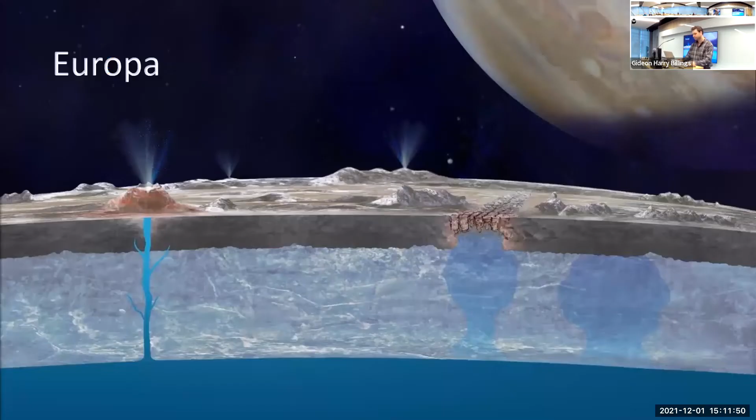In recent years, the attention of the science community has been drawn to some of the liquid ocean-containing moons in our solar system. One of these is Europa, a moon of Jupiter, thought to be a viable target for extant life. This is because there's strong evidence that beneath the ice crust could be a liquid ocean, and in the core of Europa there could operate similar geothermic processes to those in Earth's core, which could lead to hydrothermal venting.

This is really interesting because hydrothermal venting was one of the great discoveries of the 20th century. These venting systems were discovered to host chemoautotrophic organisms, which can use chemical processes to get energy rather than photosynthesis, and these organisms in turn support tiers of exotic life. The discovery of thermal vents transformed the scientific community's view of the benthic ocean, which was historically thought to be a barren landscape, to now we know that it's a rich place for life.

Also shown on the bottom right of the slide is what were dubbed Kallisti Limnes. These were discovered by one of my collaborators in 2012. They're carbon dioxide accumulating subsea pools, essentially the same composition as opal in liquid form, and they were found to support colonies of silica-based organisms. So sub-ocean discoveries like these have really vitalized ocean research, and they motivate exploration of environments where photosynthetic life is not viable.

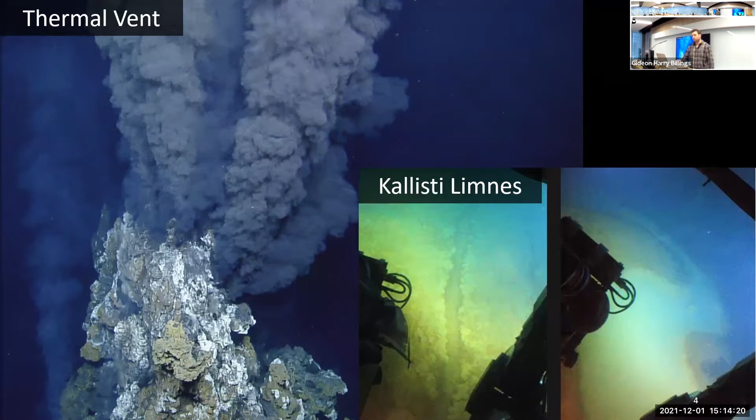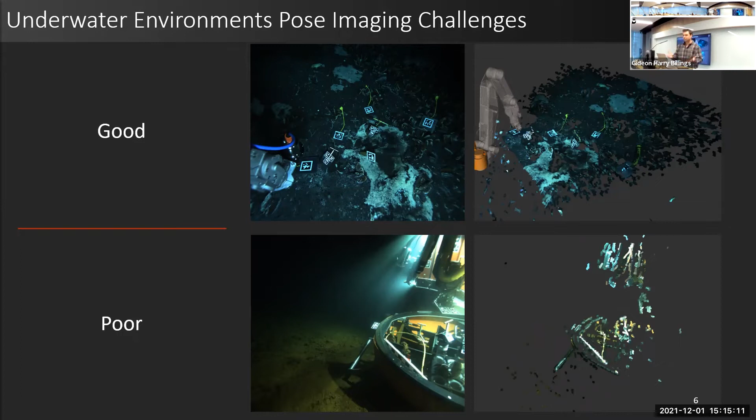However, the underwater environment presents many unique challenges to automation. One of these challenges is the limitation of vision-based sensors, due to water column effects. If you have really clear water and ideal lighting, shown at the top, you can get visual methods that work really well, shown by the dense point clouds. But in less than ideal water quality, where there might be haze and backscatter in the water column and suboptimal lighting, you tend to get vision methods that perform poorly.

This is just a brief summary of my research contributions that I'm going to go through in this talk. The first part of my work, the first two points, address the problem of detecting the pose of underwater tools so that they could be grasped and manipulated in an automated system. The envisioned application was to use a camera mounted on the wrist of the manipulator, which could be moved around to detect the tools and grasp them.

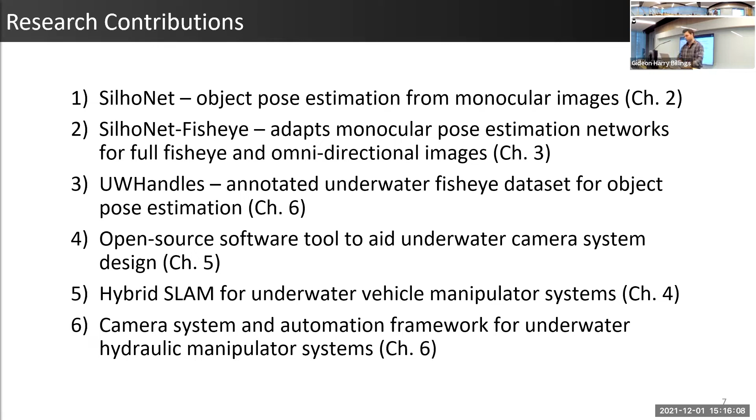I also collected and published an annotated underwater dataset that supported my work on the development of these visual methods. My latest contribution was the development of a SLAM method designed for underwater manipulation systems that can support real-time 3D scene reconstruction. My other contributions relate to the design and implementation of an automation framework for these underwater manipulator vehicles.

So I'm going to go into my first contribution, which was SilhoNet. This is a novel method for object pose estimation from monocular images.

So you can have a variety of objects. There can be occlusions, objects can self-occlude, or there can be clutter in the scene. There can be varying scene illumination, and also objects appear different depending on what viewpoint you're looking at them.

Also, while there's many applications which motivate the use of monocular images, the best performing pose estimation methods tend to use depth data. But I'm motivated by marine applications where depth sensors tend to be noisy or unreliable. Also, I'm targeting mounting a sensor on a manipulator. Housing a depth sensor on a manipulator would be very bulky to actually mount.

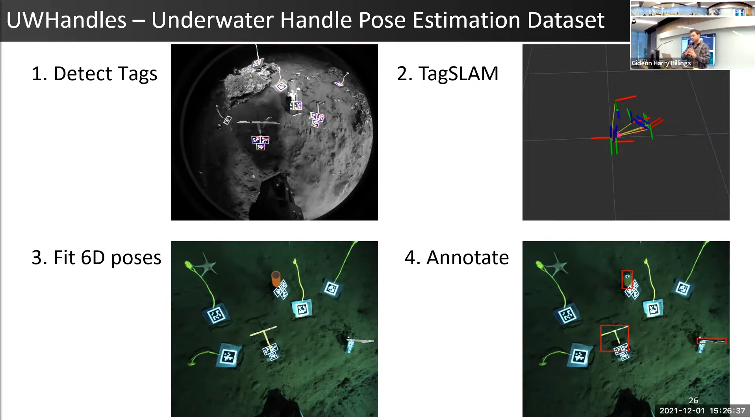An observation in underwater manipulation is that each institution tends to use the same kind of handle for all of their different tools that they use. So this can benefit automation, because if you can detect the pose of a handle and then model the attached tool, then you only need a method that can automatically detect the handle. So towards this end, our collected data set has annotated poses for 3 different types of common handles used in underwater manipulation.

There we go. Just had to restart. All right.

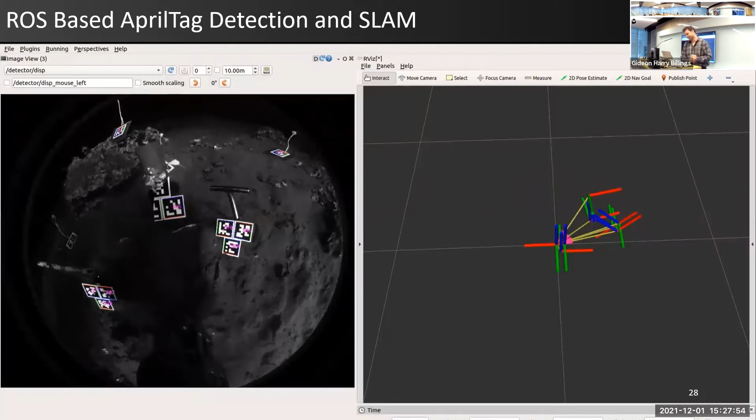There we go. So this shows AprilTag detection SLAM just running in ROS, and the output is a consistent camera pose for each image in the sequence. So I also couldn't find a freely available tool to do the kind of annotation that I wanted to do on this data set. So I developed my own tool, which enables projecting the object models into the sequence. You can scan back and forth in the sequence, tweak their fit, filter out outliers, and then project the whole image sequence. So these are actually fisheye images, but they're center rectified for visualization of the projected models.

Why do you have three tags? This is redundancy. Yeah, so the tags are kind of meaningless, like it's arbitrary where they're placed. We just put small tags on the tools because we'd be getting close to them. And so having small tags lets you get arbitrarily close or far. And then we put big tag plates dispersed out in the scene. But in this data set, the actual tags don't really matter. We found that 3 tags was more robust to detect than 1 single tag, which could be noisy in the fisheye and underwater. So more tags was just greater robustness.

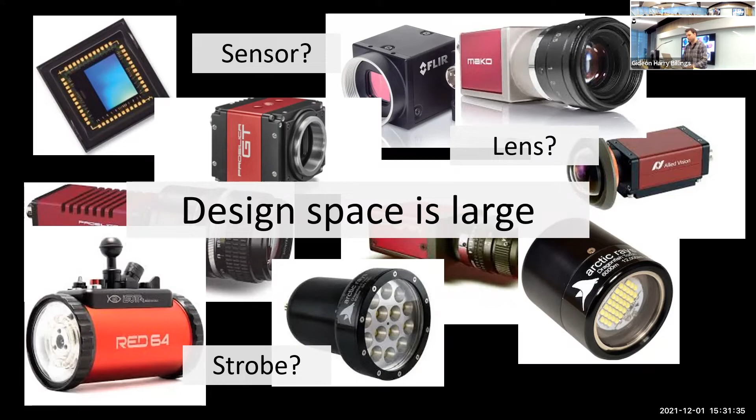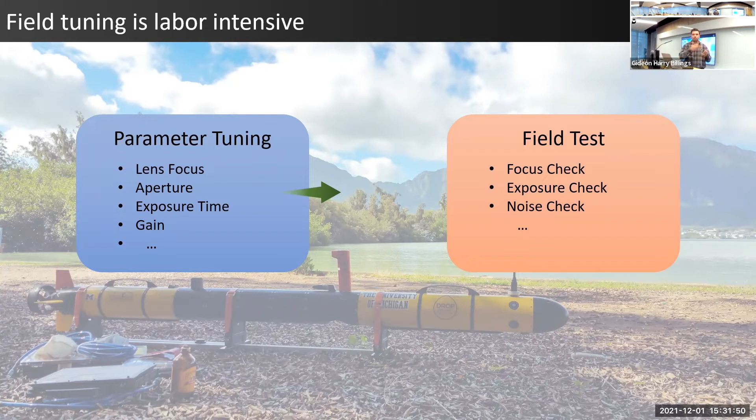So the process of designing and tuning such systems is often labor intensive, where you kind of tune your parameters, and you go in the field, you check the performance, make sure your noise levels are reasonable, make sure your image quality is good, and then you kind of go back and forth until you're at a happy medium.

So myself and my lab mate at the time, Eduardo Iscar, we developed an open source tool that took all of this in-house knowledge and fieldwork knowledge, and we developed a simplified model incorporated in this tool that can give you a back of the envelope calculator for how to design these kind of imaging and lighting systems. They inform the initial design choices, and you can tune parameters to see how they affect the overall performance. Our model accounts for light spectrum attenuation in the water column, benthic reflection, and lensing and sensor effects.

And then we experimentally verified the performance of our model in a simple lab tank setup where we had a clear acrylic tank. We put a strobe and a light on one side of the tank, and then a white matte board inside the tank on the opposite wall. And we used a spectrometer to measure the light signal at the board and at the cameras. And then we verified that the predicted attenuated light signal matched what we measured with the spectrometer.

And then we measured responses for 2 different camera sensors, where we kept the scene lighting constant but increased the sensor exposure time, and verified that the response curves matched up with the model. And then we did a similar test, but kept the sensor the same and changed out the lens, and then changed the aperture values, and also verified that we had a reasonable approximation. This is just a screenshot of the tool. It's just a simple calculator kind of interface.

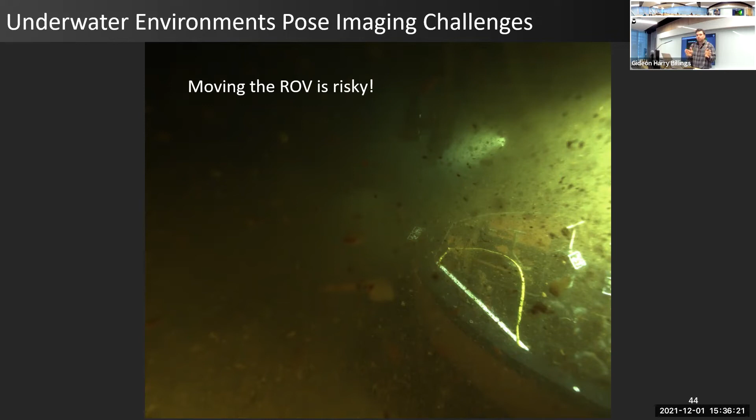However, direct interaction with the seafloor environment comes with risks, in contrast to systems that are just making passive surveys of the seafloor. So one of these challenges is that once a vehicle commits to a particular sampling location, it's not always feasible to move the vehicle around because you could greatly disturb the scene state, and you'd have to wait for the water clarity to equalize out. And often then the view of the workspace is limited to kind of one view for vehicle-mounted cameras throughout the duration of the sampling procedure.

So a natural solution to this problem is the fusion of multiple imaging sensors into the reconstruction framework. However, space for additional cameras on underwater vehicles tends to be really constrained because you have a lot of things mounted on the vehicle. So in my work, I have used a hybrid camera system that's composed of a vehicle-mounted stereo pair and then a manipulator-mounted wrist camera that is a fisheye. The stereo camera can provide dense point clouds of the scene, but only a limited view of the manipulator workspace. The fisheye camera, on the other hand, can be moved around actively throughout the scene to obtain different perspectives and provide a super view of the environment.

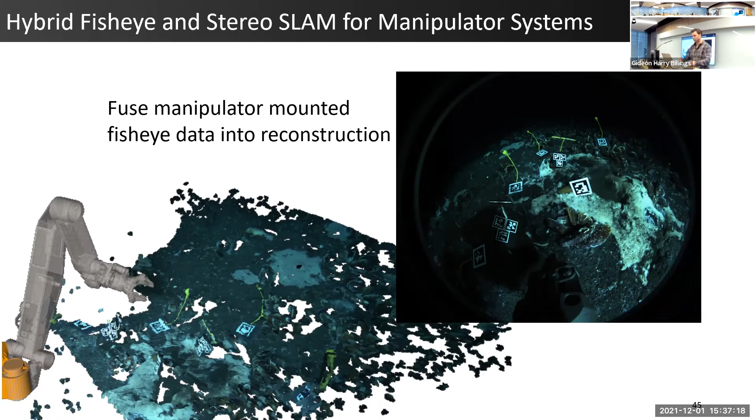However, in these hybrid sequences, the stereo is pretty much stationary because the ROV is set down on the seafloor. So I wanted to have a stereo data set that could really evaluate the underlying stereo SLAM performance of the method. So we used a diver-operated stereo rig, which I helped build, to collect an image survey of a coral reef in Australia. So I processed that stereo image data set with COLMAP to produce ground truth trajectory.

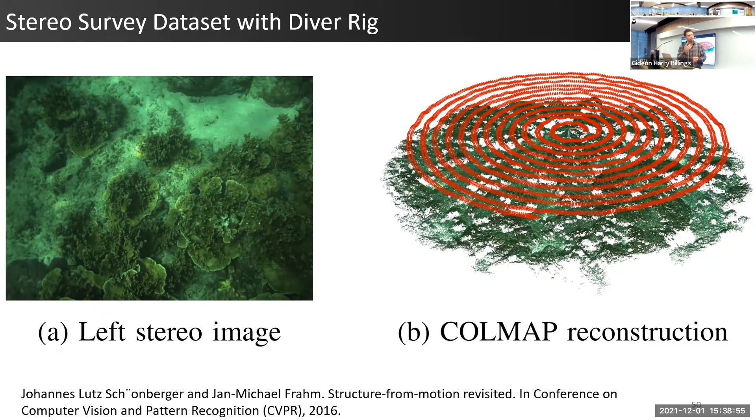And then I started by approaching the development of my method from the ground up. So the first question I wanted to ask is, what is the best feature to use in the SLAM method? I wanted to find a feature that was suitable to the underwater environment and also could robustly match between the hybrid frames, being a fisheye and a perspective stereo. So I evaluated the feature matching performance of different features by estimating an essential matrix using feature matches across hybrid image pairs. I initially found that many features were located on the artificial AprilTags in these data sets, which skewed the results. So I projected masks over the tags to limit the evaluation to natural features.

Then I compared several popular conventional features as well as 2 deep learning-based features, which were ContextDesc and SuperPoint. Since the essential matrix does not provide scale, I evaluated the translation accuracy by using the angular difference between the translation vector direction of the predicted and the ground truth. I used area under the accuracy curve as my evaluation metric. So interestingly, ContextDesc greatly outperformed all the other features. If you look at the mean number of feature inlier matches per hybrid frame, it's nearly double the best performing conventional feature, which is RootSIFT.

Out of the conventional features, SIFT and its variant RootSIFT perform the best. So for my work, I chose to use a GPU-accelerated SIFT feature for ease of implementation. But what's really interesting is ContextDesc uses the SIFT feature point detection, but uses deep learning to compute the descriptor. So my method is directly compatible out of the box with ContextDesc features.

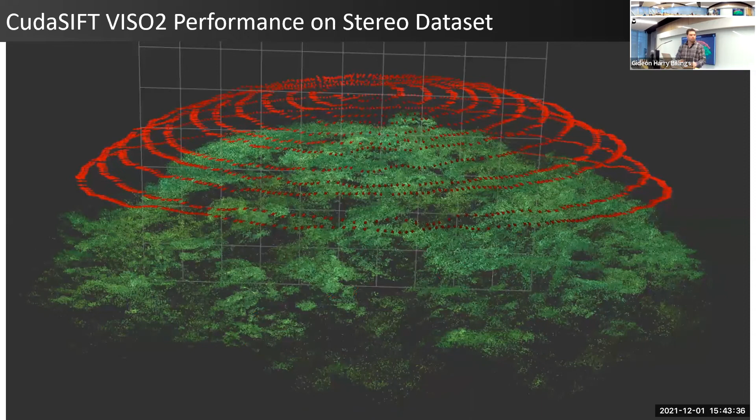My next step was to develop a full SLAM method. I based my method on OrbSLAM 2, which is a very popular and mature SLAM method for both stereo and monocular cameras. It uses a 4-threaded architecture for tracking, local mapping, loop closing, and then full bundle adjustment, which is a full optimization of that.

But the implementation of OrbSLAM 2 is tightly integrated with Orb features, which was one of the features I tested and performs pretty poorly underwater. So here's a block diagram of my SLAM method. For sake of time, I'm only going to mention some of the high-level notable differences from OrbSLAM 2.

I modified the tracking thread heavily. There are 2 separate branches for the stereo and monocular fisheye frames. CudaSIFT features are extracted from each new frame and then propagated through the entire pipeline. The stereo branch uses my modified VISO2 odometer instead of the velocity-based tracking method used in OrbSLAM 2.

The initial map is created from a stereo frame, which provides the initial scale constraint, after which both stereo and monocular keyframes can extend the map. The other threads in the system remain largely the same as OrbSLAM 2, with some modifications to support the hybrid keyframes. I also adapted the bag of words-based visual place recognizer used by OrbSLAM 2 to use SIFT features, and trained it on a 1,000,000-word vocabulary with a diverse set of underwater images.

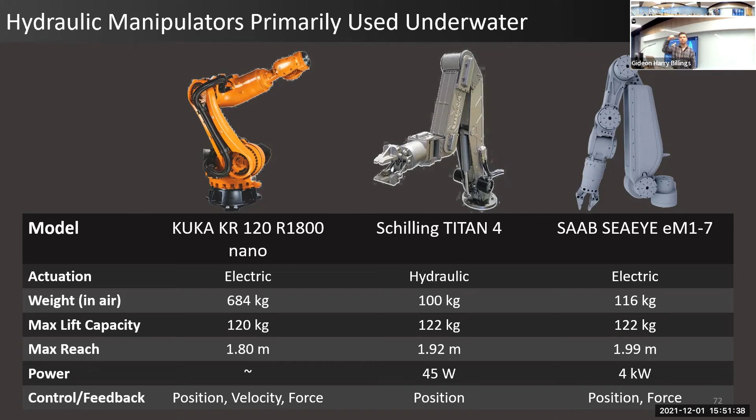Hydraulic manipulators have several positive attributes, which make them the manipulator of choice for deep ocean vehicles, but they're not designed for automation. They provide limited feedback and less precision compared to their electric counterparts.

Further challenges of automating underwater manipulation compared to terrestrial systems are that the hardware and operations are much more expensive. The hardware is prone to failure, and you must anticipate failure in the field, which I experienced on basically every field trial I was involved with.

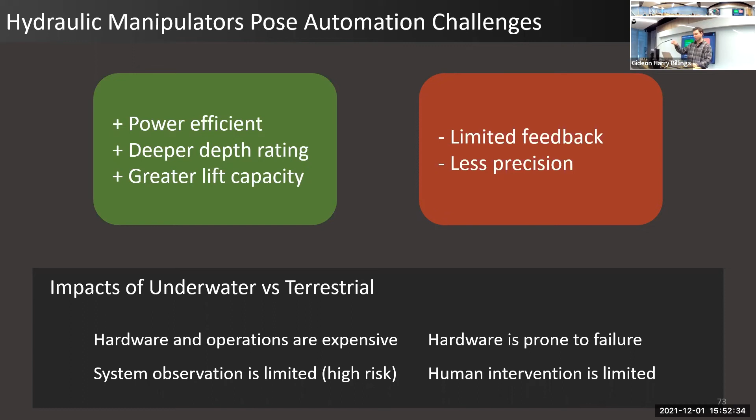The observation of the system is limited, so when the vehicle is deployed, there's increased risk of operation and testing. Usually you only have visual feedback from cameras and some sensor data. Intervention is also limited if something goes badly—you don't have a fail-safe switch you can just hit, and recovery of the vehicle is the priority when doing field work.

There have been several past projects focused on automating underwater manipulation, but many fall under the task of intervention on man-made structures, such as turning a valve, and most use electric manipulators in shallow water environments like pools. There was some very recent work out of the University of Limerick in Ireland, where they developed a visual servo control framework for hydraulic manipulators, demonstrating impressive precision control in both tank and field deployments.

But their system did not employ any kind of path planning, and they were really focused on just the precision task demonstration. So my work on manipulator autonomy is complementary to these prior works and emphasizes practical field demonstrations in natural seafloor environments.

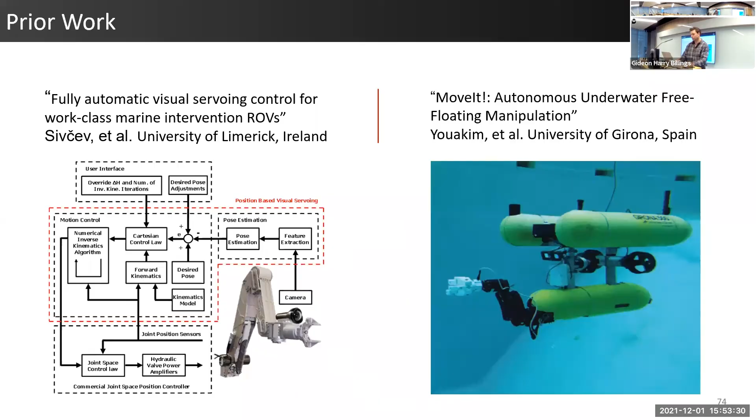In order to develop and test the automated system, we built an in-air test bed that uses the same type of hydraulic manipulator used in our field trials. The test bed also has the same machine vision camera setup and a similar configuration to how it will be mounted on an ROV.

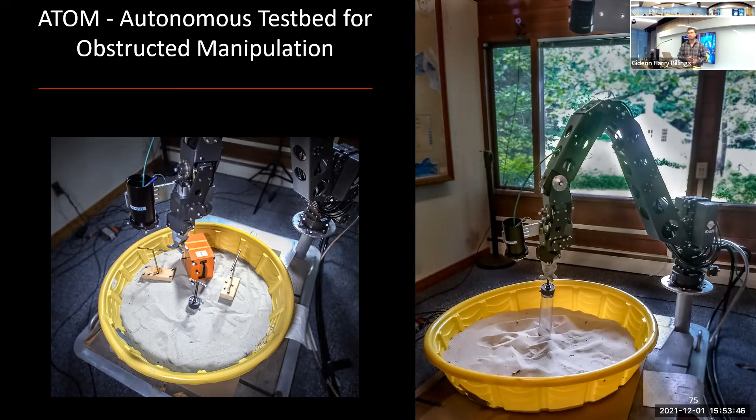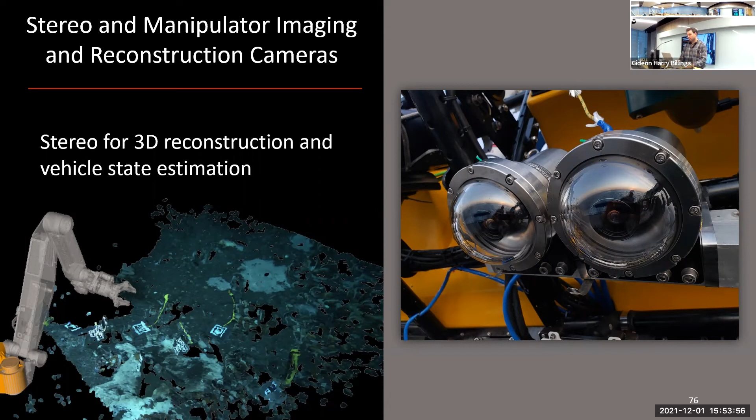The vehicle-mounted stereo cameras are used for scene reconstruction and vehicle state estimation, which you've already seen some of. The wrist-mounted fisheye camera is used primarily for tool pose estimation and extending the 3D reconstruction. This slide shows the calibration procedure we went through for the visual and kinematic system.

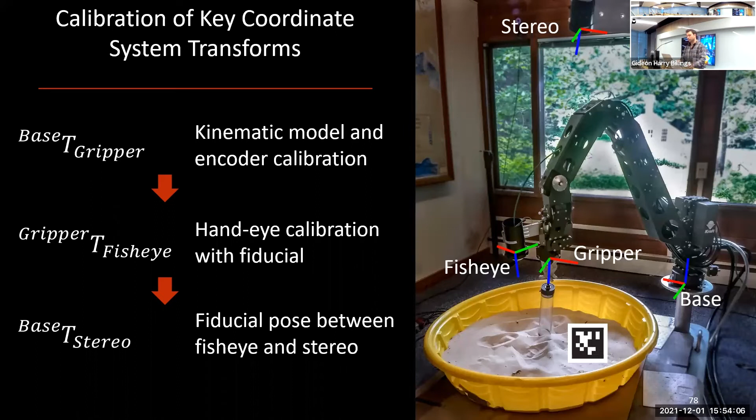I won't really spend time on this.

If the tether breaks, the vehicle switches to an AUV mode and can autonomously return to the vessel. It's designed for operation under ice, so it can operate kilometers away from a surface vessel, whereas most vehicles with a standard tether have a very limited distance they can operate from the ship. One of the big automation challenges with the NUI vehicle was also these articulating doors—since it can be a hybrid AUV/ROV, these doors can open and close.

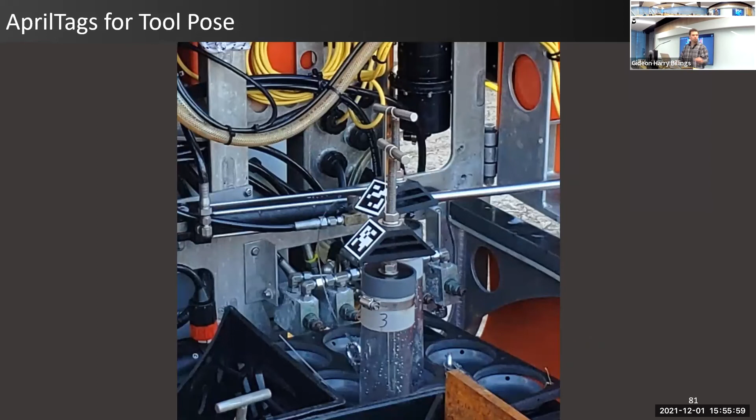AprilTags were also attached to the tool handles, and the model of the mounts and the handles were directly modeled so that you could get the handle pose directly from the tool or from the fiducial detections.

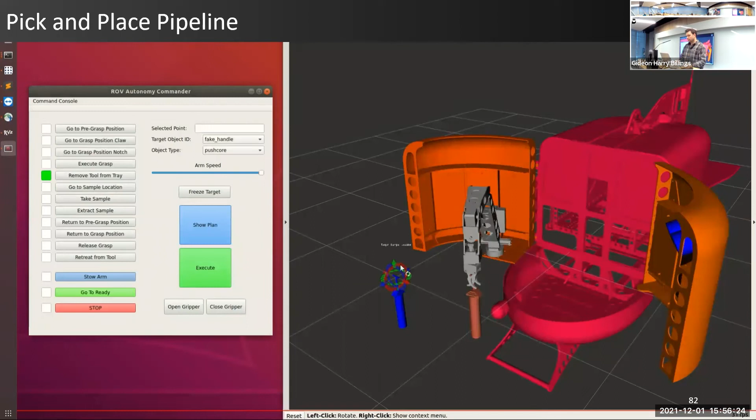In order to make every step of the automation control very transparent, I developed a high-level interface to MoveIt, which is a motion planning framework that's very popular in robotics. This interface was geared towards ROV manipulation tasks.

This enabled a pilot to step through a task and visualize each movement before execution so they could verify it looks safe. So this is just showing a simulated demonstration of how that interface works.

I just want to point out here that besides the graphical interface to the autonomy, we also had a natural language interface, which is a prototype, where the pilot can simply speak a desired command. This was work done in collaboration with Matthew Walter at the Toyota Technological Institute in Chicago.

So I'll now go into some of the results we've gotten from the field. I've participated in 4 research cruises over the course of my PhD work.

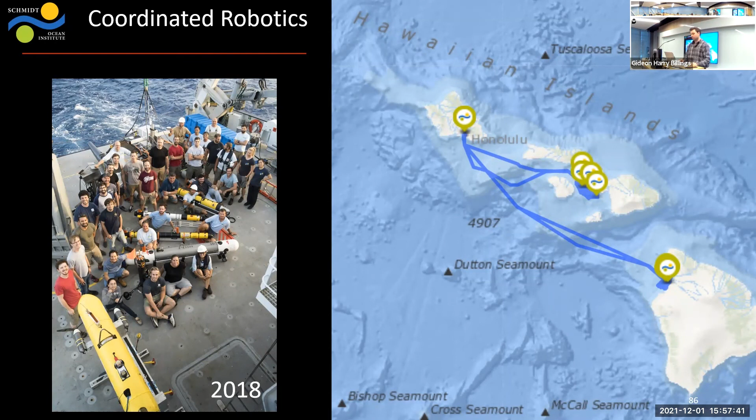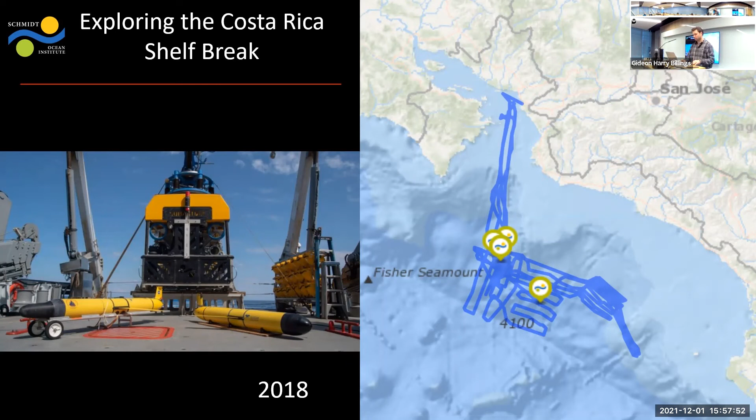The first cruise was with Schmidt Ocean Institute in the Hawaiian Channels. The second cruise was also with Schmidt, where we explored the Costa Rica continental shelf break. The third cruise was in the Mediterranean Sea off the coast of Santorini, where we explored the active submarine volcano Kolumbo.

Both of these cruises and the cruise in Costa Rica were operated like analog missions to an extraterrestrial exploration of, say, an ice moon like Europa. In this analog, the surface ship operated like an orbiter doing flyby mapping.

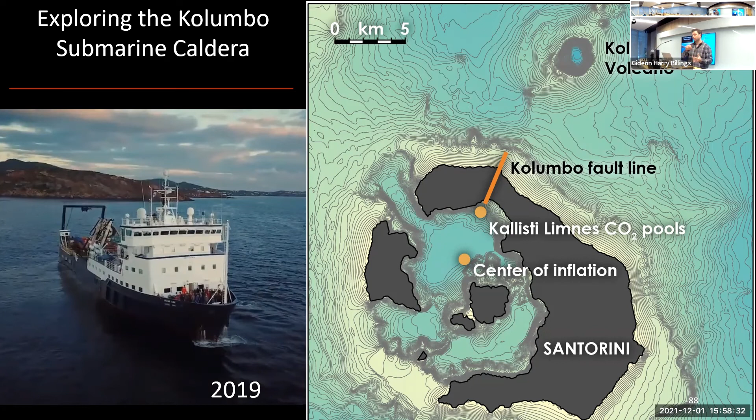The gliders acted like long-range reconnaissance drones. They were outfitted with mass spectrometers to sense chemical anomalies, and they also had scanning sonar to do terrain-aided navigation. The ROV, the NUI ROV, acted like a lander, where mission waypoints were informed by data collected from both the ship and the gliders.

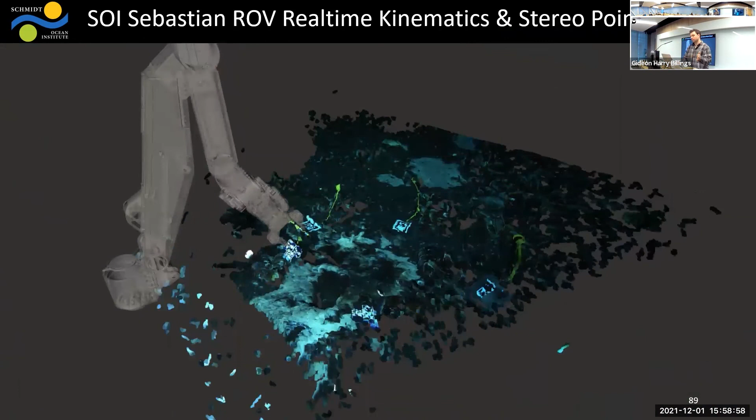The first demonstration of my system was on the Costa Rica cruise, where we collected the data sets used throughout my thesis work. We mounted our camera system on the Sebastian ROV, operated by Schmidt, and we demonstrated 3D point cloud visualization and the calibrated kinematic configuration of their manipulator. We were able to have this as visualization for the pilots in real time.

Then the next demonstration was on the Atom testbed, where I showed fully autonomous execution of the pick and place pipeline using just the graphical interface and no direct pilot control of the manipulator.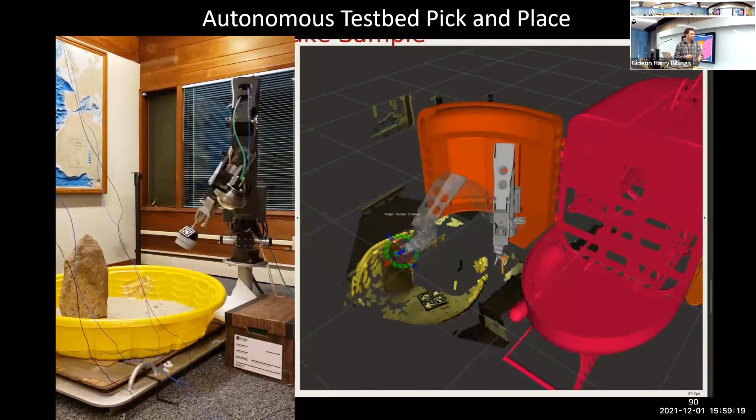So I'll just let this finish here. This is essentially, before I was allowed to deploy the system on the actual vehicle, I had to do demonstrations in simulation and on the testbed to show that it was a viable method.

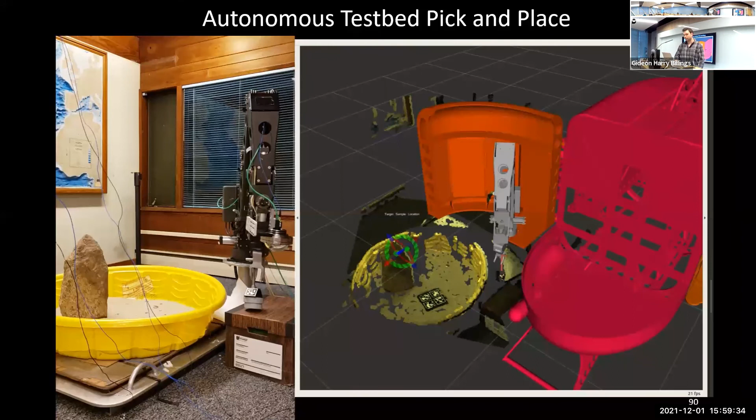Due to issues with the hydraulic arm on this cruise, though, we weren't able to do a pick and place with a push core.

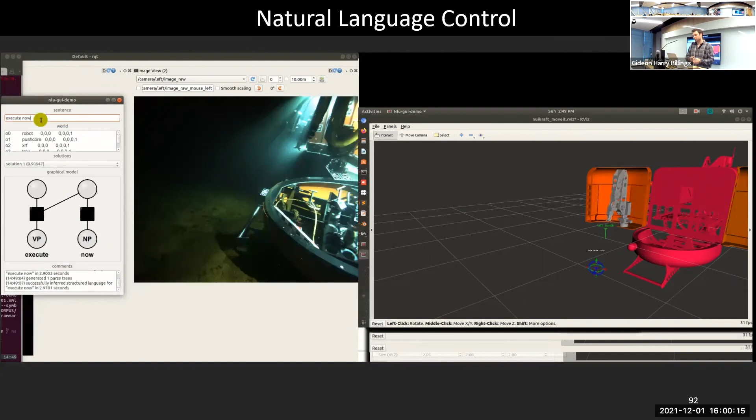Also, as proof of concept on this cruise, we showed an initial demonstration of natural language control of the manipulator. We had an NLP network, natural language network, that interfaced with the automation system, and it enabled voice and text actuation of the interface commands.

In this video, we demonstrated commanding the arm to move to a target location, then back to stow with text commands.

All right, and then finally, this last September, I participated in a cruise off the coast of California, where we demonstrated distributed shared autonomy for ROV manipulator control. My collaborators developed a Unity-based app which allowed users not physically present on the ship to interact with the autonomy system. The app visualized the vehicle state and the 3D environment and provided a command interface where a user given access permissions by the pilot could send requests through either a graphical interface or a natural language interface. A shore server communicated directly with the ship and distributed the sensor feeds to any number of connected users.

My collaborators in this work included Andrea Daniele and Professor Matt Walter from Toyota Technological Institute, Amy Phung, who is in a joint PhD program at MIT and Woods Hole Oceanographic Institution, and Dr. Richard Camilli, who is a scientist at Woods Hole. We demonstrated cooperative control of the manipulator to perform a complex sampling task with no pilot in the loop. So in this demonstration, myself and Matt Walter were on the ship, while the others interacted with the system through the app from various locations on the shore.

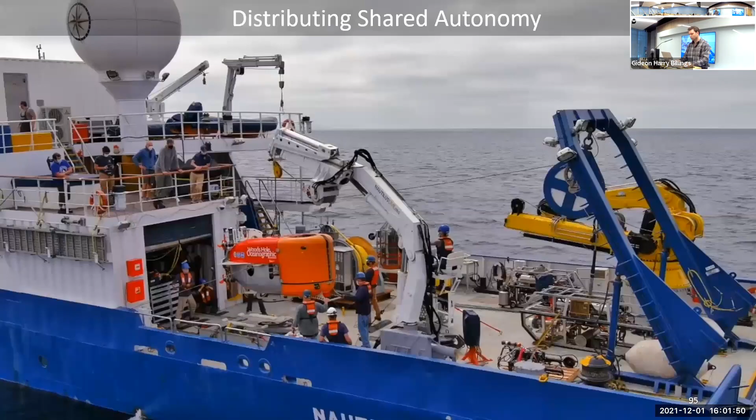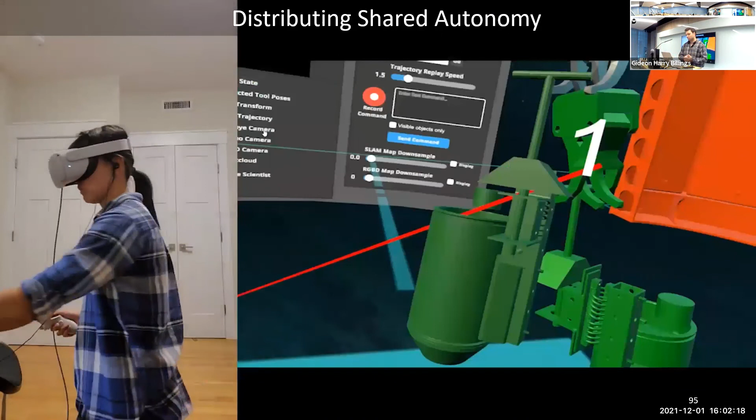So here is a highlight video of our demonstration. So Andrea used natural language to interface with the app to send a request to pick up an X-ray fluorometer tool that we carried on board. From the pilot interface, I verified the generated motion plan and then executed the requested task. After I used the pilot interface to grasp and remove the XRF from the tool tray, Amy Phung used a VR version of the app to position the tool in the desired sampling location.

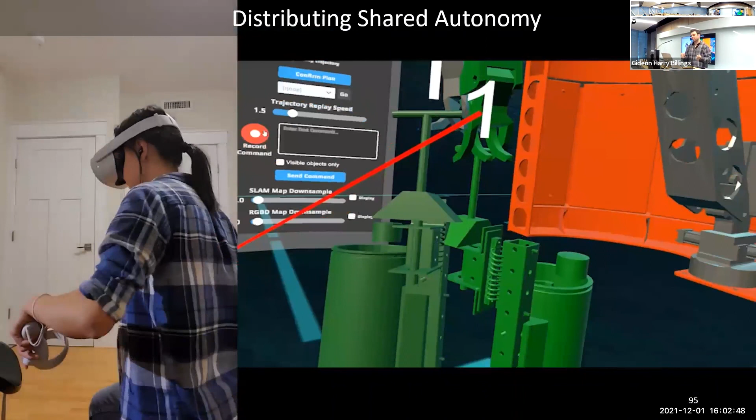And then not shown in this video is that after the tool was placed, Rich, who was the one who designed the XRF tool, was able to monitor the placement of it from the app, give us feedback in real time, and he was also able to monitor a real-time feed of the sensor, because it's an active sensor, to determine when it had collected enough data. So all of this was able to be done in a collaborative manner with no pilot controlling the manipulator at any point.

So this was a super exciting demonstration because it showed how field robotics can be distributed to be more collaborative and inclusive. So no longer is it limited to participants that have to be physically present. So this kind of system also enables broad outreach and engagement where students and researchers can be plugged into field deployments in real time.

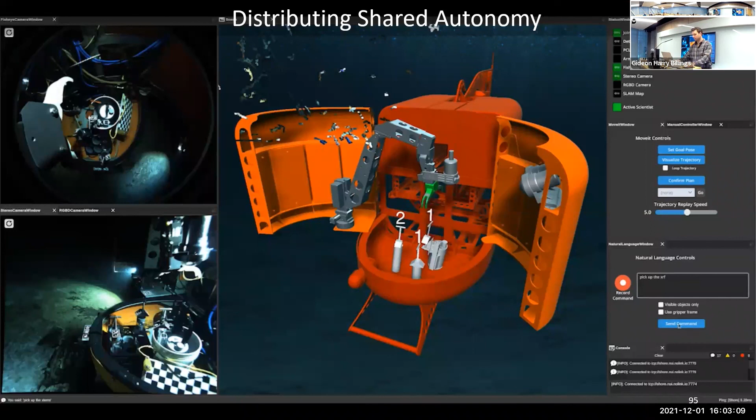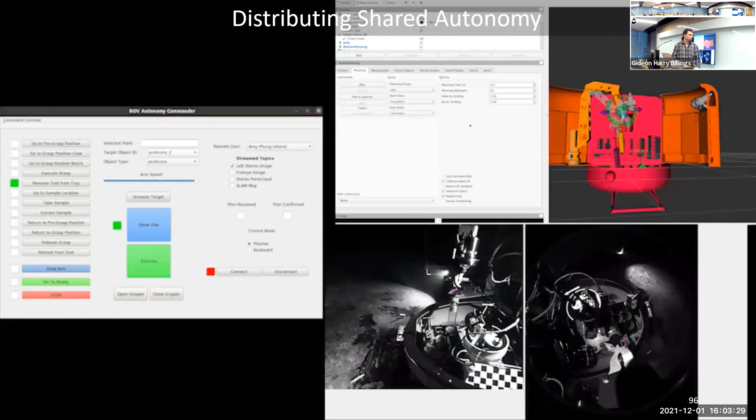We also used the pilot interface on this cruise to demonstrate our target push core sample collection using only high-level commands. So this is just using the push button interface. I did cut out a couple pauses. And I think the video is sped up by like 2 times. And there's push core.

Okay. So in conclusion, that is an overview of all my research work over the last 5 years. I want to thank all my lab mates with whom I've shared many experiences, my family who has offered endless support to me as I pursued my dreams, and then Matt, who saw something in me when I was fresh out of undergrad.

So my work throughout my PhD has been motivated by a passion for discovery. We only have one planet, which so far is the only known source of life. Yet so much remains to be discovered on our own doorstep, cosmically speaking. So my hope is that the technologies that I'm working to develop will advance our capabilities and reduce the costs to explore and discover first the oceans in our own planet and eventually the oceans of other worlds.

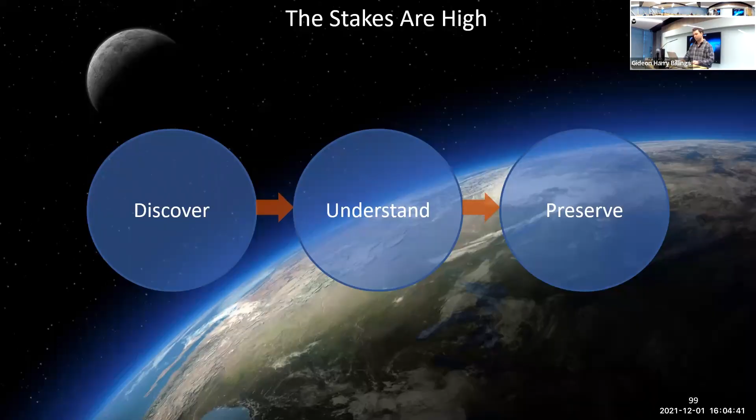I believe discovery leads to understanding, and understanding informs how we can conserve our vital resources and preserve our rich habitats. The oceans are not a vast desert, but are full of diverse environments teeming with life in the most beautiful and exotic forms. And we are only beginning to understand how big a part these ecosystems play in the health of our planet and our future existence.